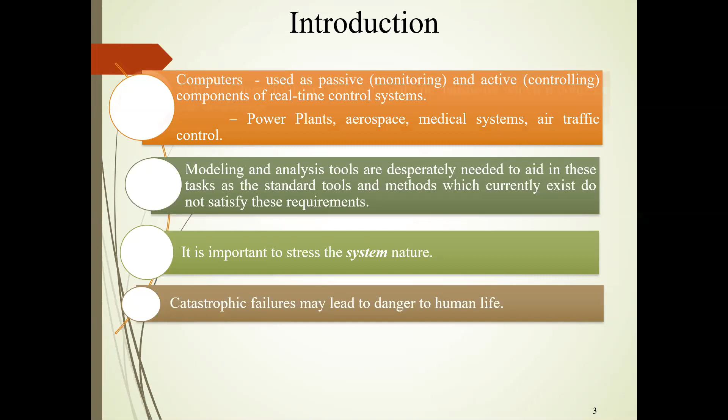An important fact is that software does not harm anyone, but it can control the hardware, and if it is not able to control the hardware as per the intended functionality, the hardware can harm or damage things. Therefore, software safety must also be considered as part of the overall system safety.

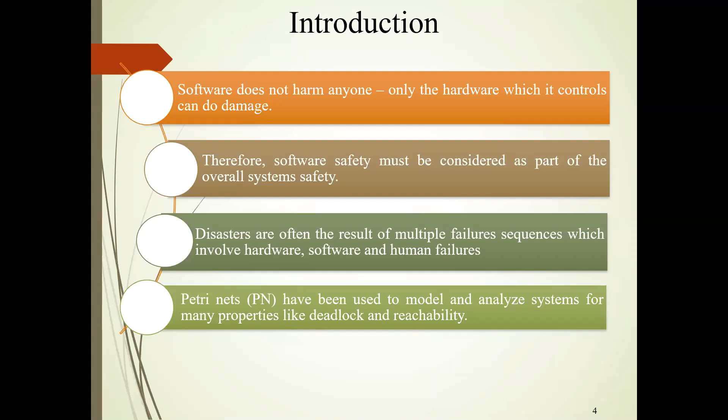Let us switch to Petri nets. The concept was introduced by C.A. Petri, a German PhD scholar, in 1962, to model the stochastic behavior of a process. After going through the thesis, MIT USA was trying to explore whether this modeling construct would be able to model concurrent or parallel systems, because in the 1970s there was an era where people were striving to develop concurrent or parallel systems.

With this objective, they conducted a conference in 1970 on concurrent systems and parallel computation. The conclusions were very beneficial, and people started taking interest in exploring the possibility of strengthening the model further to solve more challenging problems.

With this objective, they decided to meet again after 5 years. In 1975, MIT USA conducted a conference on Petri nets and related methods. It then started gaining popularity, and the industry also started using it for modeling purposes. Looking at the demand in the industry, Germany started a course on general net theory of processes and systems in 1979.

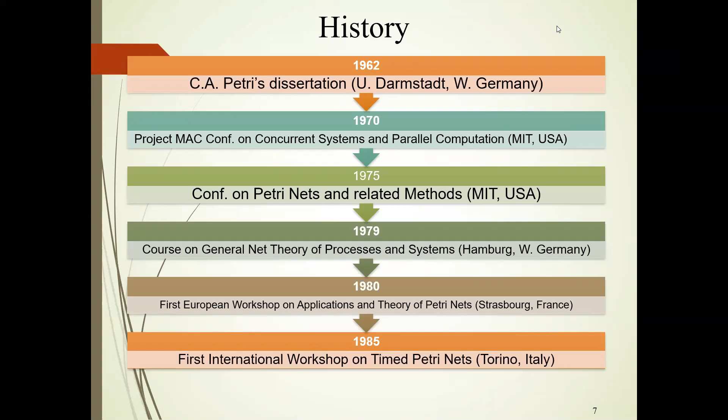There are many other flavors of Petri nets, and although this is not an exhaustive list, I wanted to cover this slide to let you know the important milestones by which Petri nets became so popularized, and what the various capabilities of this modeling construct are. If you look at the applications, it can model almost all kinds of systems.

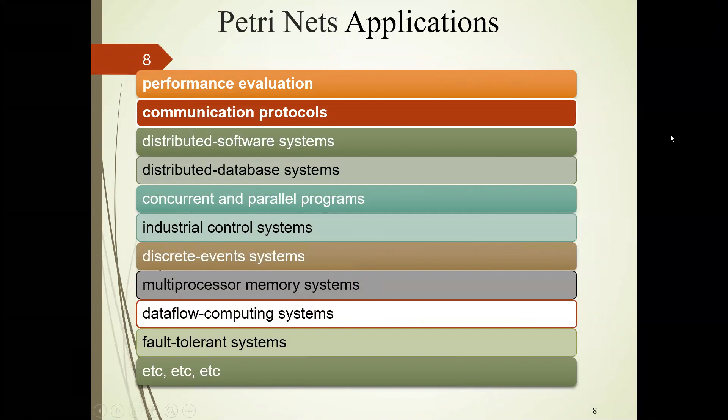Now let us go through the working mechanism of the Petri net. Suppose, for example, I want to model a very small, very basic chemical reaction: hydrogen plus oxygen gives water. It's a very basic chemical reaction that we might have studied in class 9th or 10th. Let us see how we can model this chemical equation with the help of a Petri net.

First, let us see the basic building blocks. In this Petri net figure, you can see three big circles, which are known as places. I'm using one place to represent hydrogen, one to represent oxygen, and one to represent water. Then you can see the rectangular box, which is known as the transition. There is only one transition in this figure, and there can be a connection between places and transitions, and transitions and places, but there cannot be a direct connection from places to places or transitions to transitions.

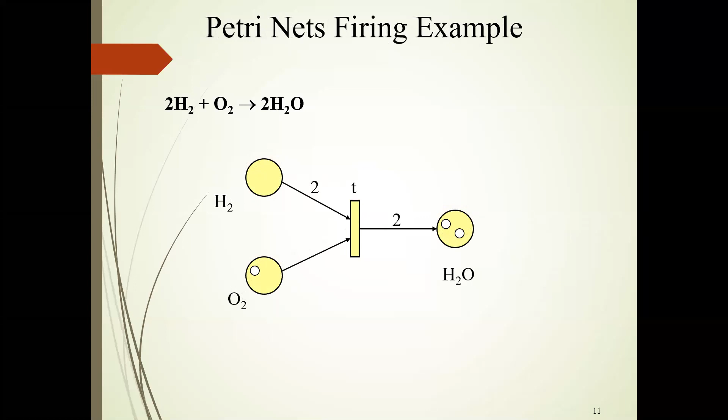So that was the working mechanism of the Petri net, and now I'll be taking a case study of the reactor protection system. Although the methodology can be used in any mechatronic system, here I am taking a case study of the reactor protection system, which is a complex control system comprising several safety electronic and mechanical components known as nuclear safety components. It is used to shut down the nuclear reactor, and hence it is also known as the shutdown system.

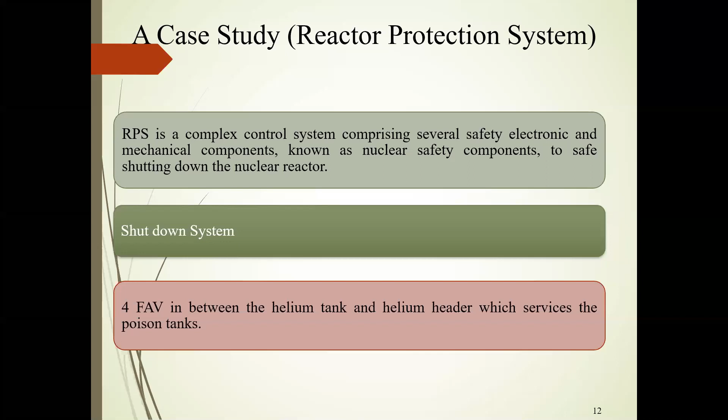We know nuclear fission is a chain reaction for generating power in nuclear power plants. Uranium has a very heavy nucleus, so it can undergo spontaneous fission, and when it fissions, some radioactive elements come out, and in one reaction about 200 million electron volts of heat energy comes out, and 2 to 3 neutrons also get generated.

Now, this is my model, and I want to address the safety in that model. So what is the whole idea? The whole idea is to first create a reachability graph. I touched upon reachability graphs when I was explaining the basic hydrogen, oxygen, water chemical reaction. It represents the possible states that can occur throughout the operational period of the system. And states are basically the representation of the tokens. Only the places that contain tokens will be responsible to change the state of the

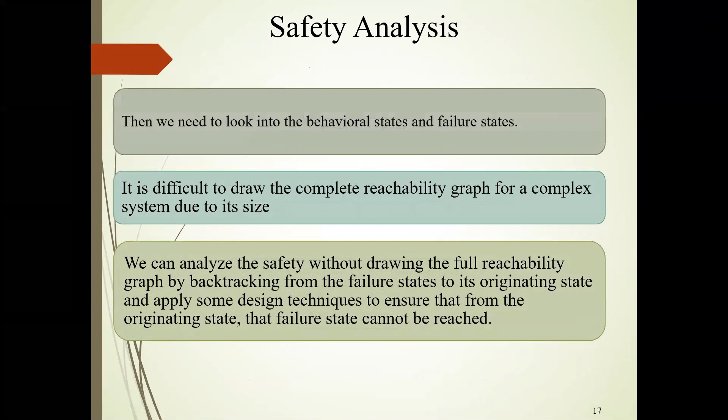system. For example, in this figure, the tokens are only in 3 places: PPD, PFAVCD, and PFAVC. So this is the initial state, and you can write it as S1 with these places: PPD, PFAVCD, and PFAVC. Now going back to the same figure, you can see one transition is in enabled state, that is TTPD, and hence this transition will fire, and after firing, the token will be moved out from the PPD place and will be deposited to PLCon and PREVV.

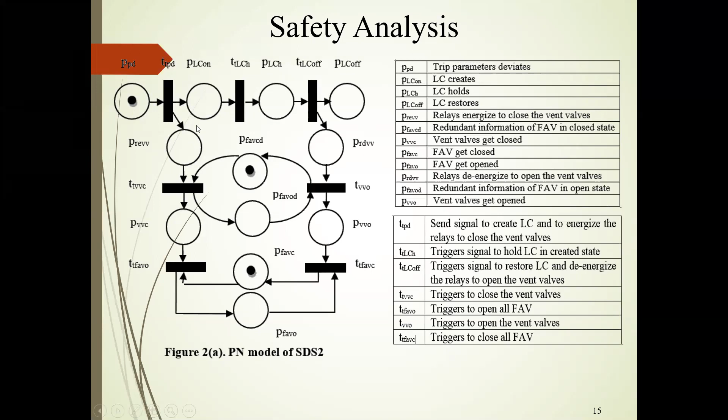So here PPD has been replaced with PLCon and PREVV, because the token has been moved out from this place and deposited in these 2 places, and the rest of the places have been written like this. And similarly, we can keep on deriving the states till we reach all the states in the system. And now we have to analyze each and every state with respect to whether any state is risky or every state is safe.

It is like this. For example, a human being can have various states like eating, sleeping, moving, walking, and meeting an accident. Other than meeting an accident, all the states are normal or behavioral states. But meeting an accident is an accidental state, which is a risky state. So here, we have to analyze each and every state and try to find out whether there is any risky state. And after that, we have to find a provision where we can avoid these states. In this figure, the 2 states that I have identified as risky are S3 and S6, represented by the solid triangle on the left upper part.

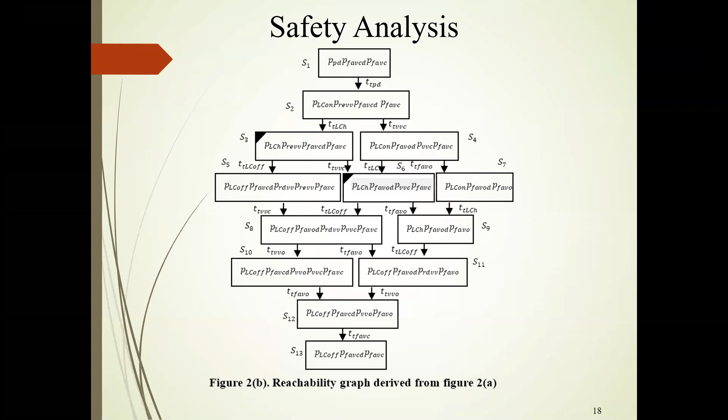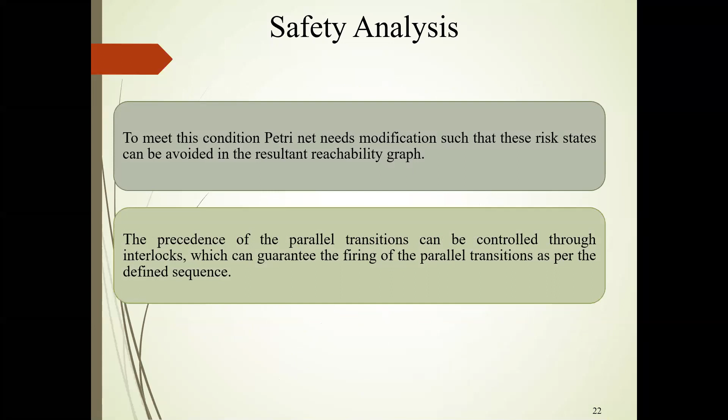Now let us come to the implementation part, how we can do that. These two states were the risky or threatening states. So how in the model can we prioritize TFAVO over TLCH? Just connect from TFAVO, put an additional state, and connect that state to the transition to which I want to give less priority.

And similarly in the case of TVVC and TLCH, so that I can ensure TLCH can only be fired when there is a token in I1 and I2. Both are written as I1, but one is I1 and one is I2; it was a printing mistake. So then I can be 100% sure that TFAVO and TVVC will always get first preference whenever they are in a race condition with TLCH. It means I have handled this in the model.

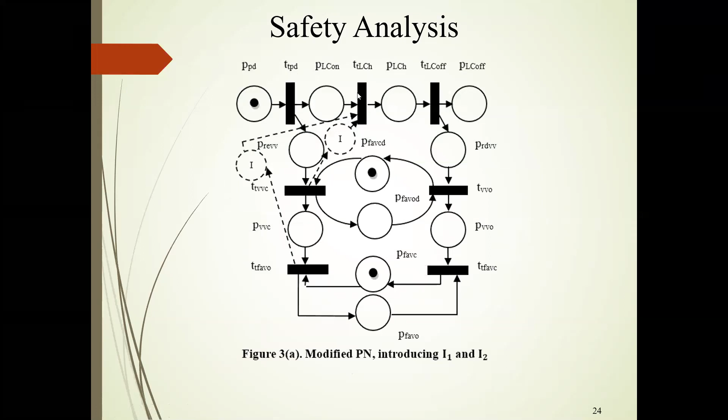And now let us see the implementation, how we can do it. Again draw the reachability graph. After drawing the reachability graph, this is the graph that we see, and here we are not finding any risky state. It means it is fine. But our story doesn't end here. We have to go for optimization as well.

Because inclusion of additional places will increase the number of states, and that will increase the computational complexity exponentially. We can see these I1 and I2 were the additional states. They are not performing any role in achieving the functional requirements. Hence, first I can ignore I2 and consider only I1.

Then I can draw the reachability graph and see if all the states are safe states or any state is risky. If any state is risky, then I can do vice versa: put I2 and ignore I1. In this way, there could be a possibility that with only one additional place I could serve my purpose and ensure safety. But if I am still getting any risky states, then there is no option at all. We have to go with this model.

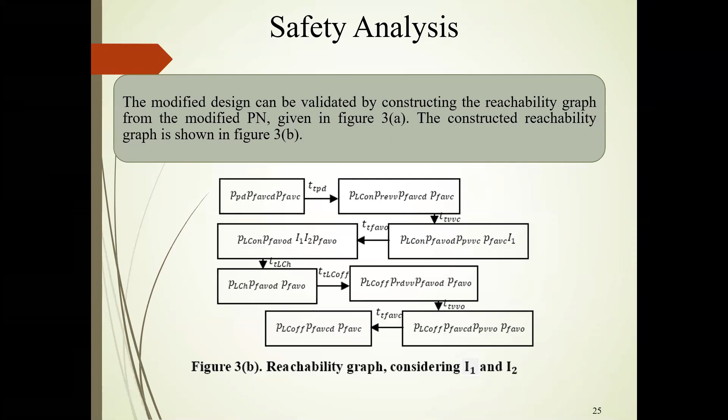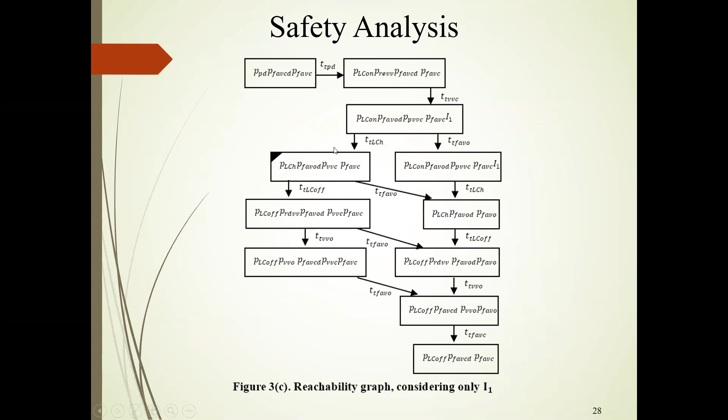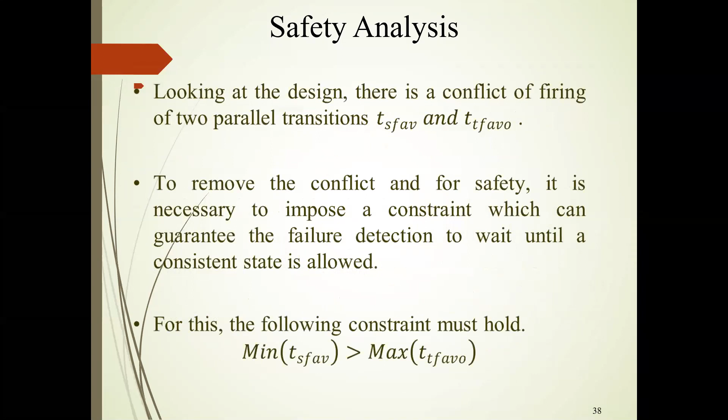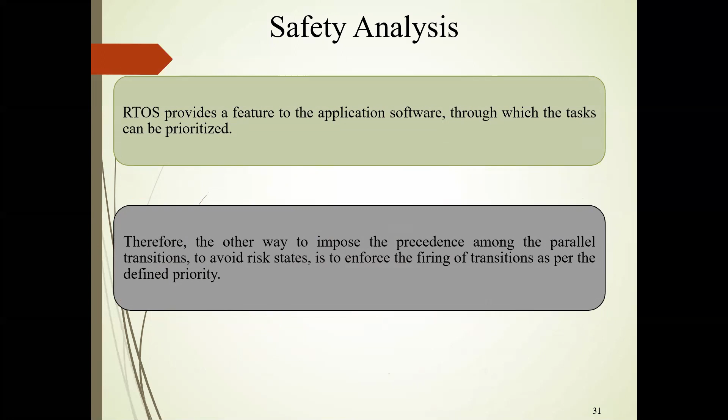Now let us talk about the implementation logic, how we can achieve that. We know the RTOS, or real-time operating system, provides a feature to the application software through which we can prioritize tasks. Therefore, the other way to impose precedence among parallel transitions to avoid the risky state is to enforce firing of the transitions as per the defined priority. So I can put a constraint.

It can be done by enforcing a timing constraint in the design itself: the minimum of TLCH should be greater than the maximum of TFAVO. This constraint always ensures that TFAVO will be fired. This constraint must be checked by the hardware or software logic as per the requirement. If the system fails to meet this constraint, logic must be built into the design such that control reaches back to the originating state of the risky state, and we retry the processing meeting the same constraint.

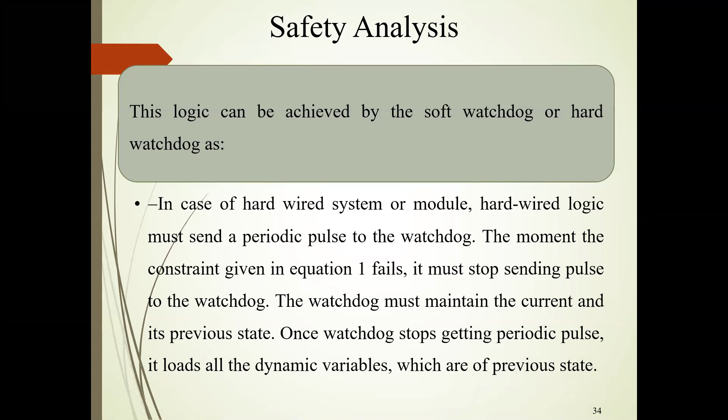This logic can be achieved by a soft watchdog or hard watchdog. In the case of a hardwired system or module, the hardwired logic must send a periodic pulse to the watchdog. The moment the constraint discussed in the equation fails, it must stop sending the pulse. The watchdog must maintain the current variable states and the previous variable states. If it stops getting the periodic pulse, it loads all the dynamic variables of the previous states, so that even in case of any risk, I will be in a safe state.

The other possibility is to reset the microprocessor IC through the reset pin, and this will reset the system state.

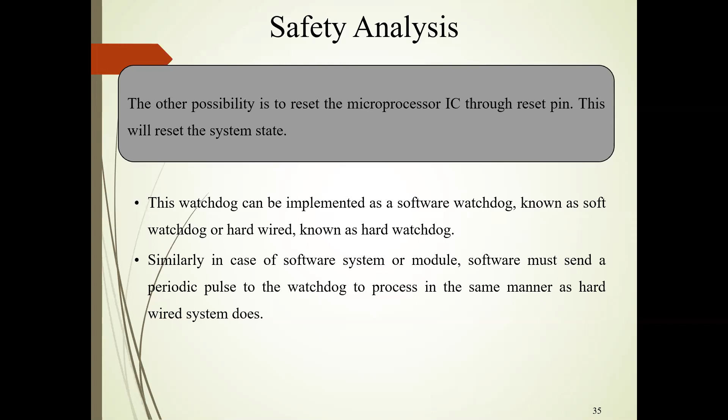And this concept can be implemented in soft watchdog or hard watchdog. Similarly, in the software system, the software must send a periodic pulse to the watchdog to process in the same manner as the hardwired system does. But okay, that's the implementation part, how we can do that. But still we have to investigate further for more and more issues, to solve more and more optimization concerns.

Let us assume that my logic condition is created to trip the reactor, and the embedded system closes the vent valves to satisfy the interlock for poison injection. But there is some security threat, and some bad signal has come which is overriding my closing logic. How can I identify this? By identifying the inconsistent information in the places representing the state of the fast acting valve, that is PFAVO and its redundant place, and PFAVC and its redundant state.

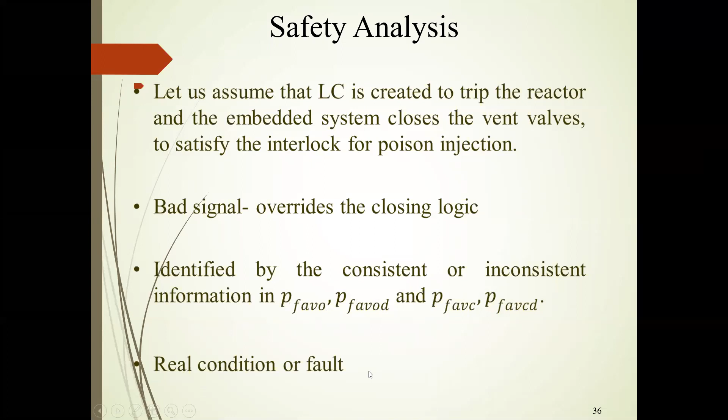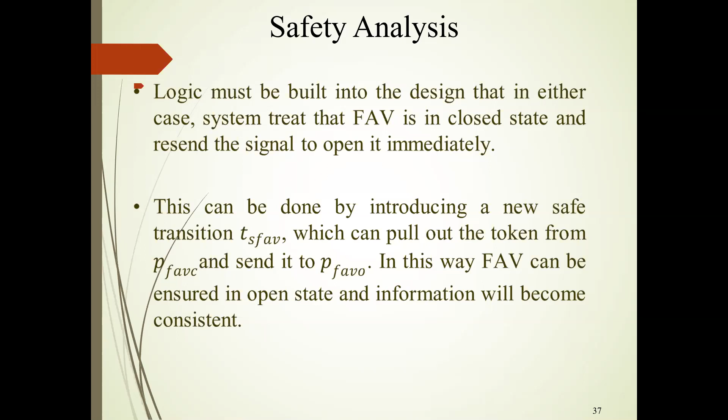And there could be a real condition or fault. So we have to build a logic that in either case the system has to treat that my fast acting valve is already in closed state and resend the signal to open it immediately. How can it be done? We have to introduce one safe transition, that is TSFAV, which will ensure this constraint. So whenever it sees any trip parameter and the fast acting valve is in closed condition, it can pull the token and forcefully put the token in the fast acting valve open state.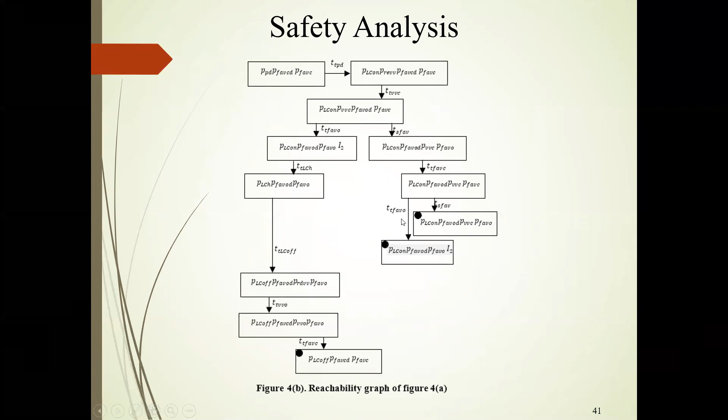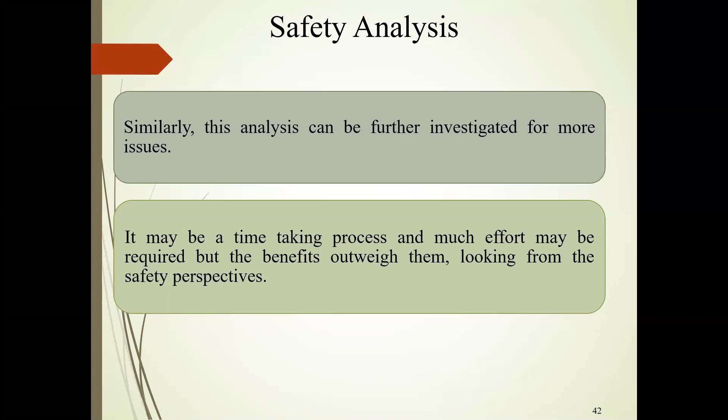So similarly, we can analyze the model for further issues, and definitely it can be a time-taking process, but the benefits will outweigh our efforts, looking from the safety perspective. And if your system is complex or bigger in size, the analysis can be done in parts, maybe component by component or function by function. Or you can segregate the important functionalities and concentrate more on them for the safety analysis. You should also understand that all the risks do not have equal probabilities.